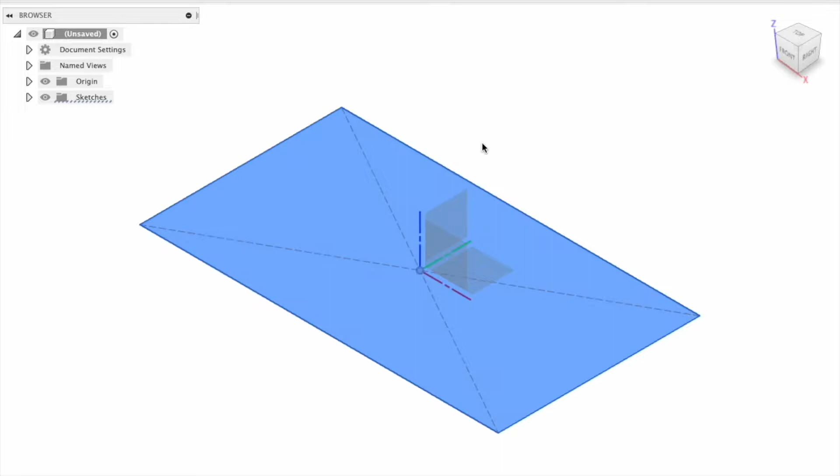Gonna do a little extrude here. So I think the first thing I did, I hit S, and I have a bunch of my shortcuts here. You should already be at the place where you can build your own shortcuts. So I'm not going to explain that. So I finished my sketch, and I'm going to click here and press Q to extrude. And then I'm just going to pull it up a little bit and wait for my computer to catch up. I've just created a new body here.

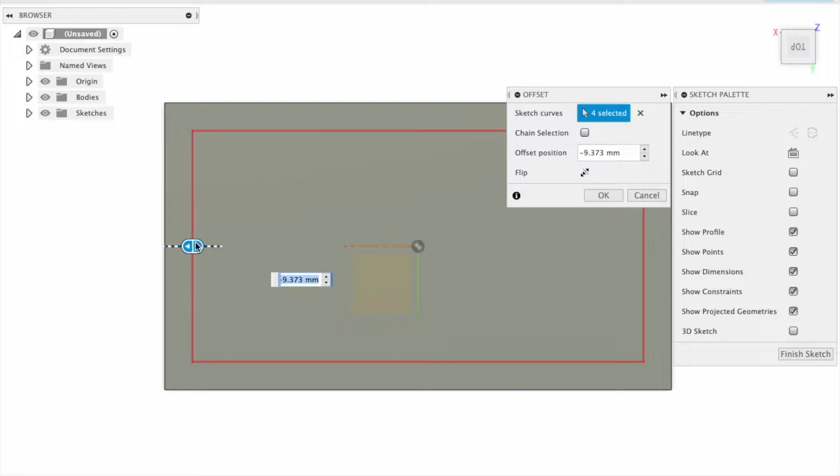So the next thing I'm going to do is right click on the top here and go to create sketch. Then I am going to, let's maybe click here, double click the perimeter, and click offset. I'm just going to pull this in here and then click OK.

Because what I want to do is pull up the outside. So I'm going to click on the outside I've just created and press Q again. Then I'm going to pull that up to this. And over here, instead of join, I'm going to click on new body and click OK.

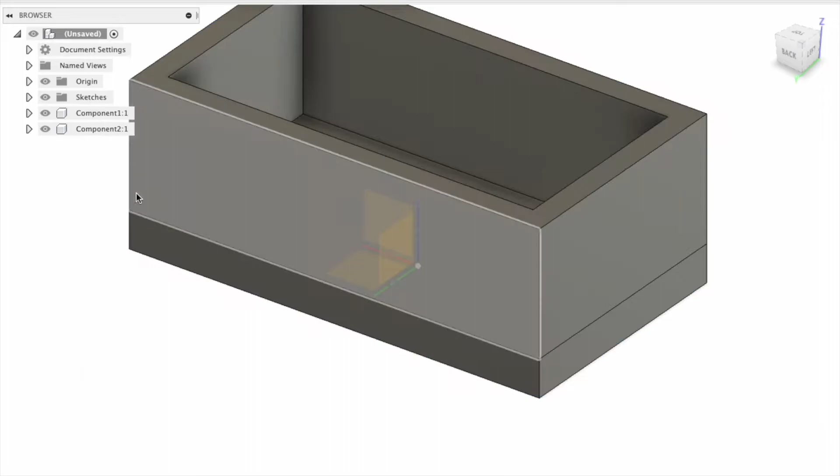Now these are two bodies that I have here, and we can see this over the body section. I'm going to highlight both of them, right click, and go to create components from body. So now I have two separate components here, the bottom and the top component. You can double click and call them whatever you want.

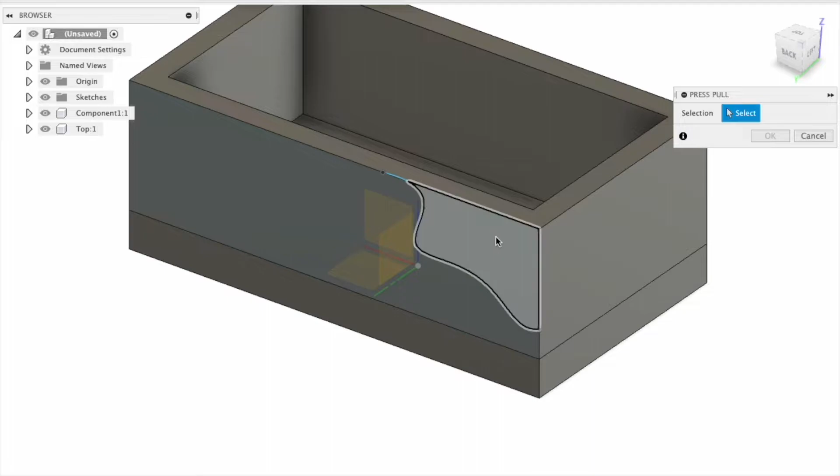With the top, I'm just going to do one more thing. I'm going to create another sketch, do a free form, and pull it, make a little wonky design here to the end. I'm going to finish that, and press Q, Q to pull.

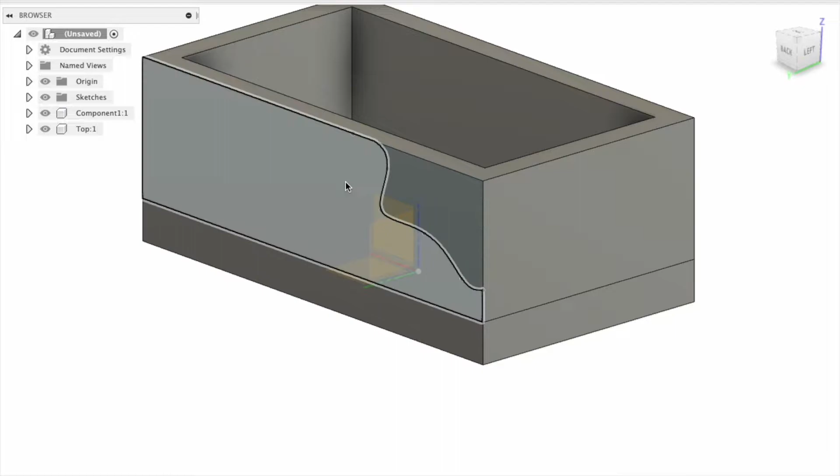I'm going to go around to this side by pressing Shift and two-finger swiping, then click on the other face, and it's going to automatically pull it across and choose the operation cut there. So I didn't quite pull it across as far as I wanted, so I'm going to try that one more time. See if we can pull it right over here.

I'm not sure why it's not cutting that, but as a shortcut, instead of trying to figure out what's going on, I'm just going to pull it farther than necessary, and it's going to chop right through that. So now what we have here is a little Santa Claus sled, which I've unintentionally made.

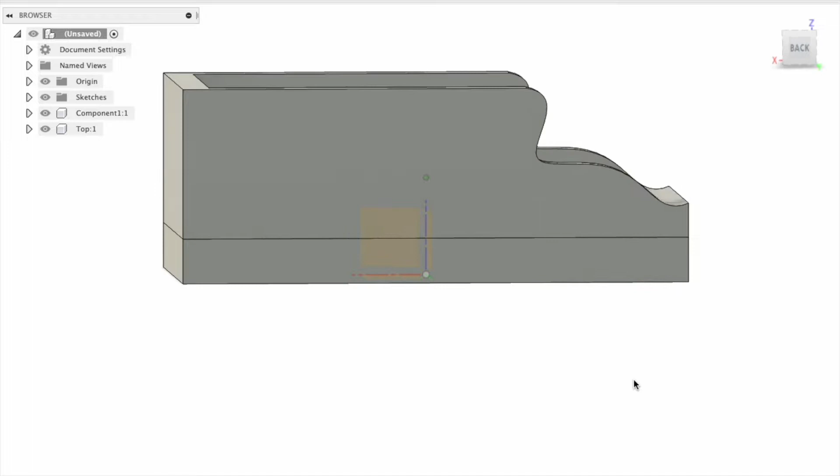So I'm just going to save my design here. And I'm going to call it Santa's Tester.

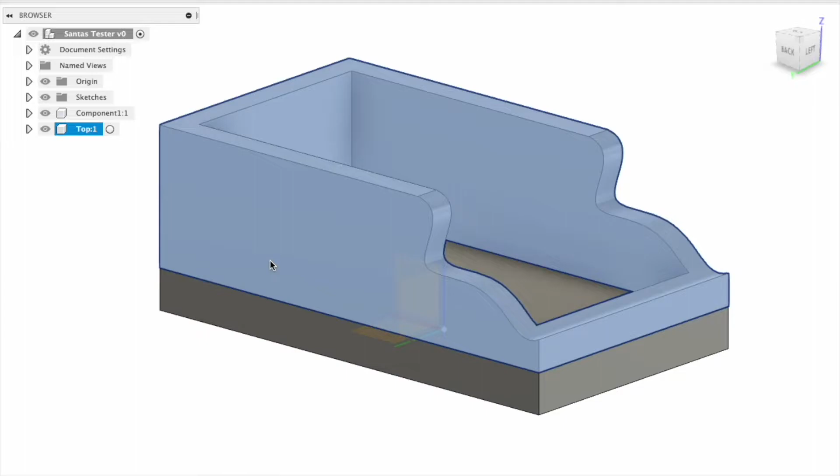Then what I'm going to do is start adding materials. I'm going to right click on the top and go to physical material, and make the top of Santa's sled out of not gas but glass. You can see there are a lot of different types of glass here, and this is going to affect the stress test that we're going to do soon enough.

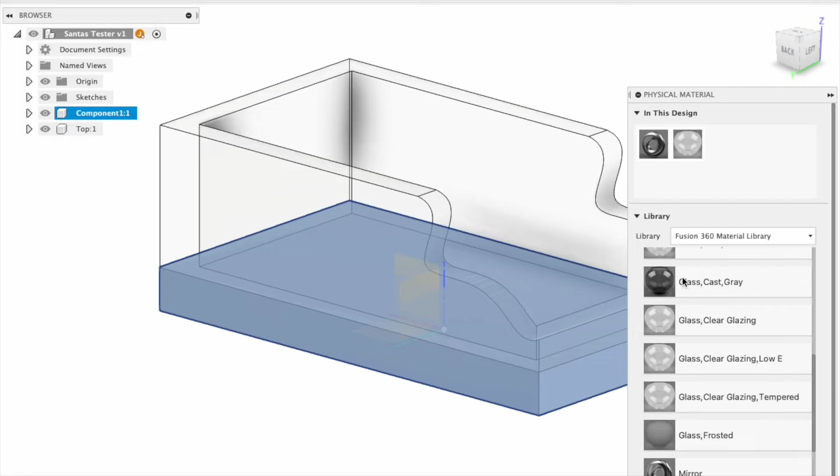Then I'm going to right click on the bottom component, and what I did was I just dragged the material over and dropped it on top of the component I wanted. So I'm going to the second component now, and I'm going to make it out of, let's make it out of metal, aluminum. So let's take that, and again I just dragged it and dropped it on here.

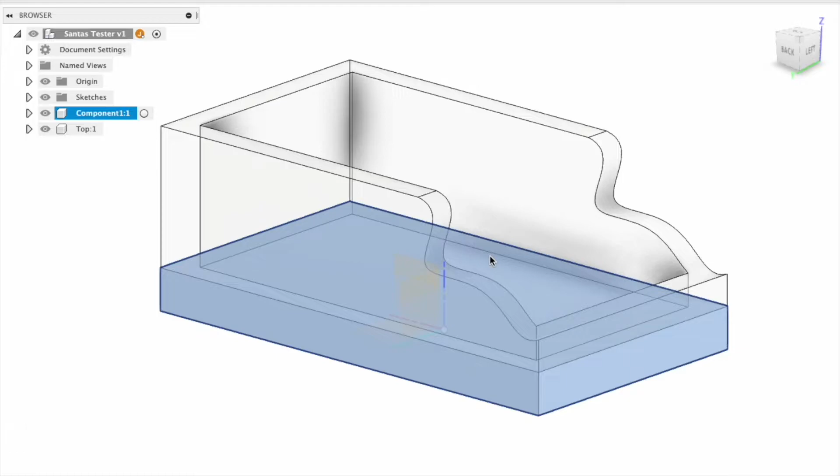You see there's a lot of different types of aluminum, and each one has its own special properties, different types of strength and different material characteristics. So that's what we've done. If we look at the component now and go to physical material, we're going to be able to see, I just want to make sure that this one is aluminum. Okay, and then we should be done for this.

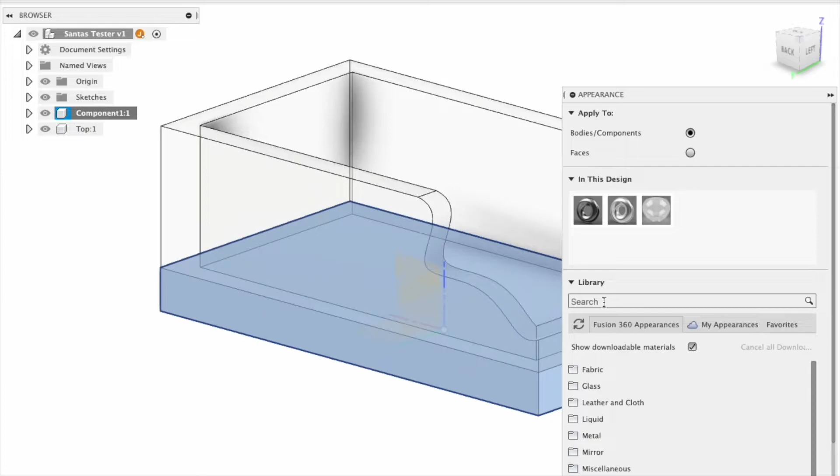So the other thing I want to briefly touch on is appearance. The appearance is what it actually looks like on the outside, so this is if you were to paint it, you could give it a look. So if I want to look for a green color, because you know Santa likes green, right? I can take the green and make it look green, although when we're looking at the physical material it's still going to be glass. All right, so now we've got that.

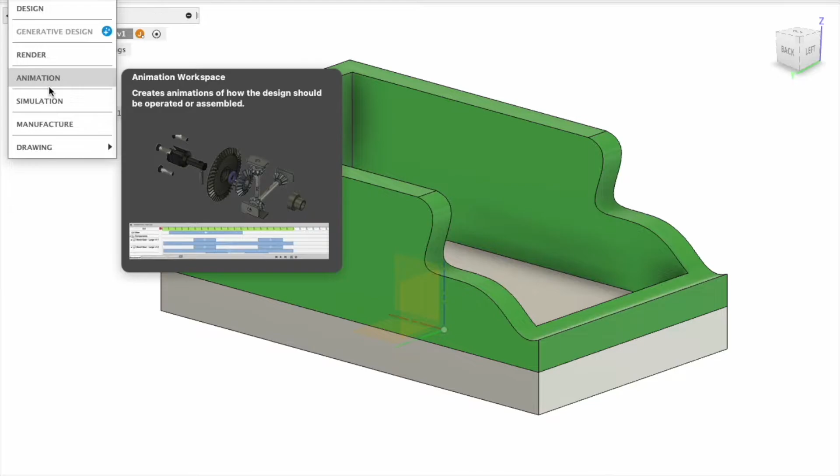We've got two separate components. We've done an appearance, so it appears to be green. The physical material itself is glass and aluminum. Now what I'm going to do is go over here and create an animation. With this animation, you can actually do one that goes through time, and you can record an animation on this.

All I'm going to do is move this component so it's slightly separate from the other component, so we can see it's two separate components.

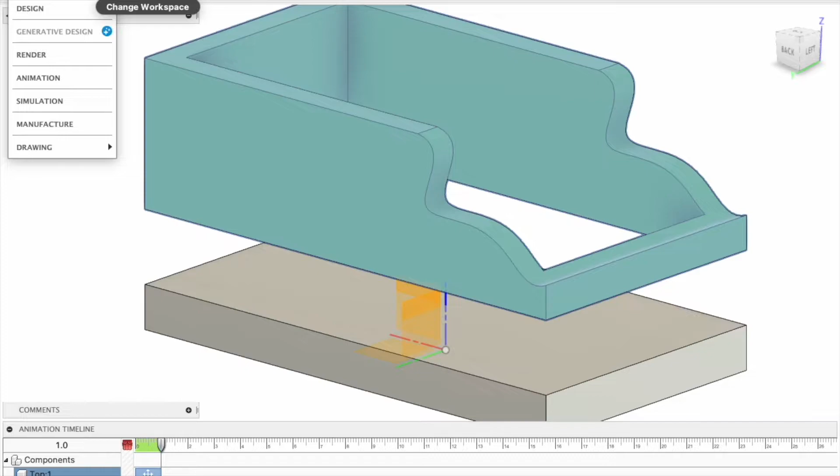The reason I'm going to do this is because I'm going to go to drawing from animation here, click OK, and this is going to give me an exploded isometric drawing that I can then create a components list with.

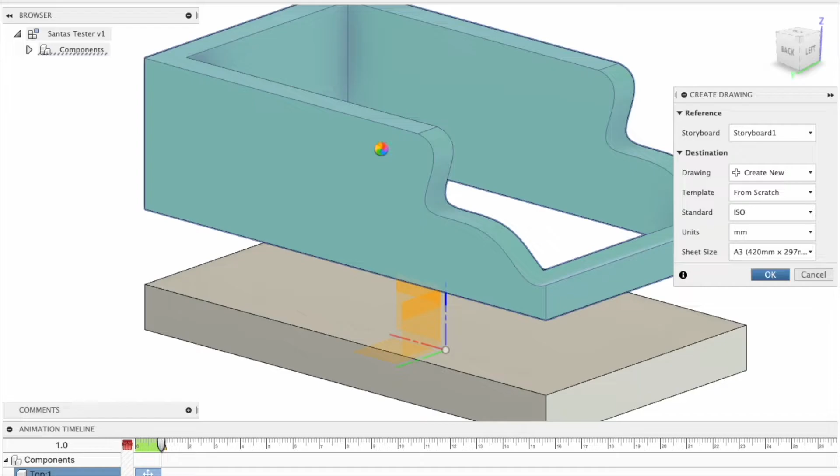So this is a really cool one. Now we'll wait again for the computer to catch up to me, and I'm probably going to chop this portion out of the video, so it's going to immediately switch over to the exploded isometric drawing.

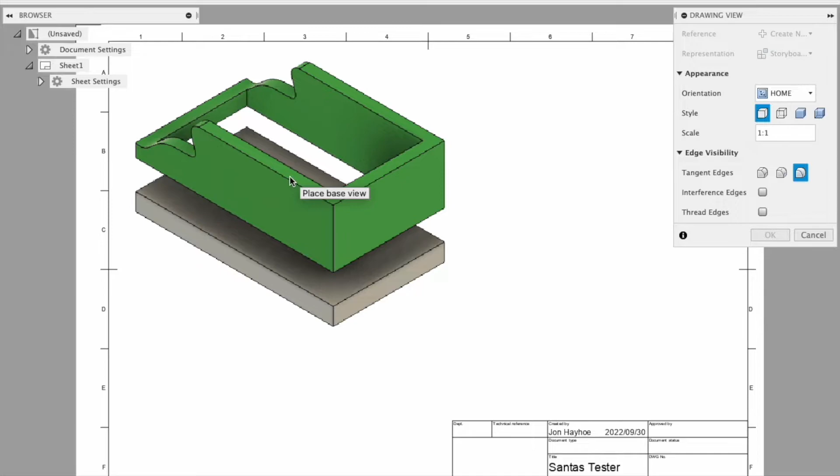I'm just going to click here, and then I can click on maybe shaded drawing. That's going to keep it nice and colorful for me because I'm doing the exploded isometric.

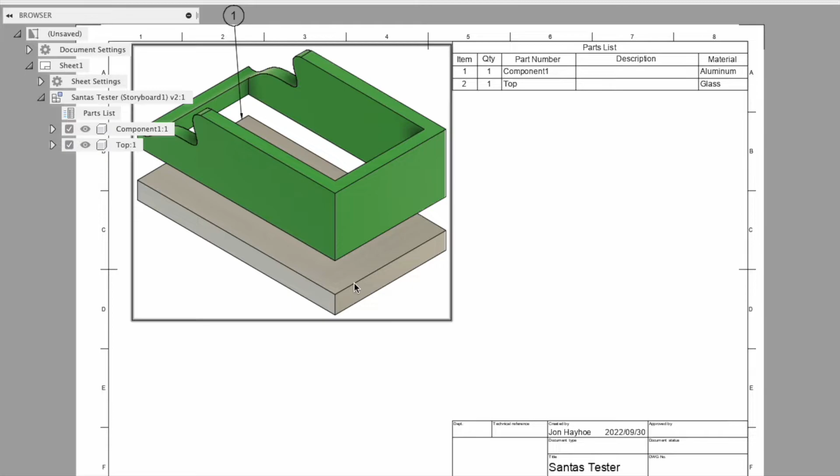I'm going to go up here and click tables, and I'm just going to put a table in here, and you can watch, boom, this has automatically just made a table with 2 components.

One of them should say number 2 somewhere, but it's not showing up. It should have a number 2 sticking out somewhere, which I'll have to look into in the future. But item number 2 should be made out of glass, which is here, and item number 1, which it's pointing to down at the bottom here, is made out of aluminum.

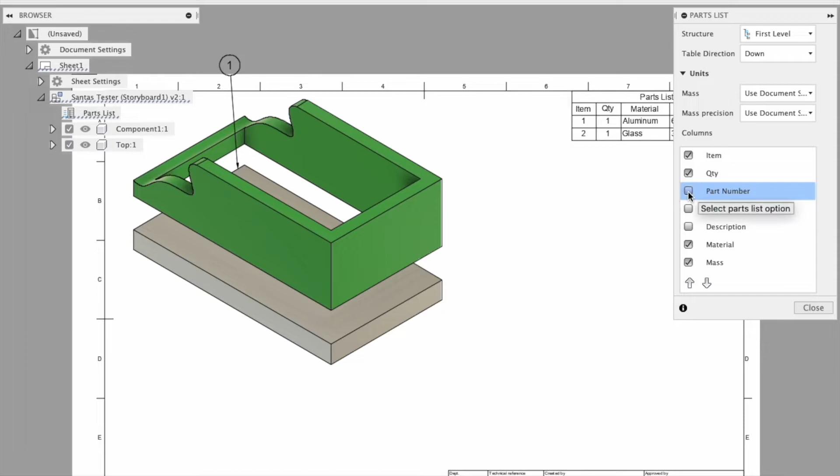And then it shows the quantity and everything. Actually, if you double click on the table, you can add different things in there. So because I don't have a description, I can take that away. The part number you can include or disclude, the quantity you can put in there as well. It's really cool. The mass actually helps you calculate costs and things like that.

And again, I'm not sure why the number 2 didn't show up, but it's because I only have component 1 clicked.

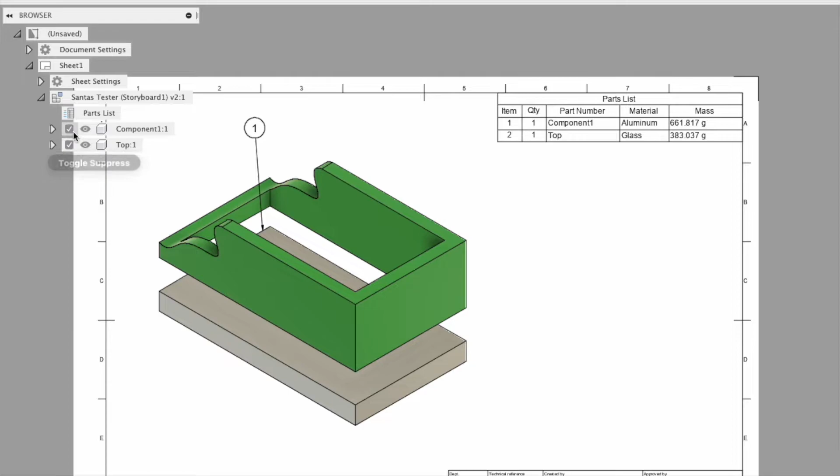So that's going to give me an exploded isometric drawing, which is really, really cool.

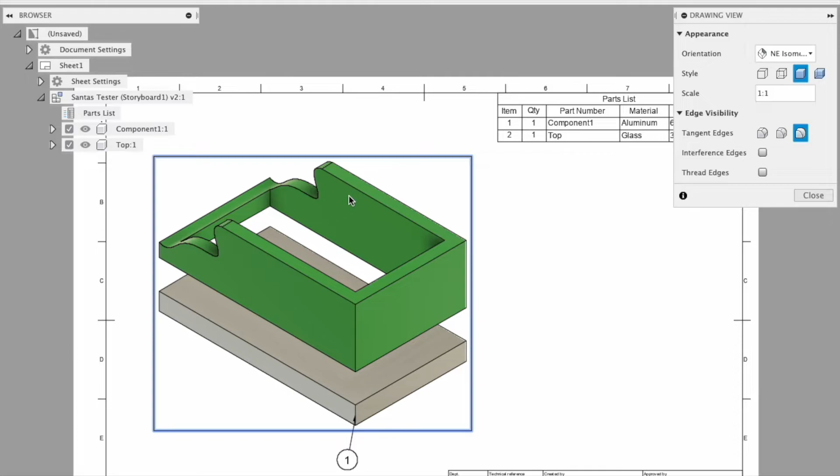The next thing we're going to do is go back here to our design view, and we're going to do a drawing from our design.

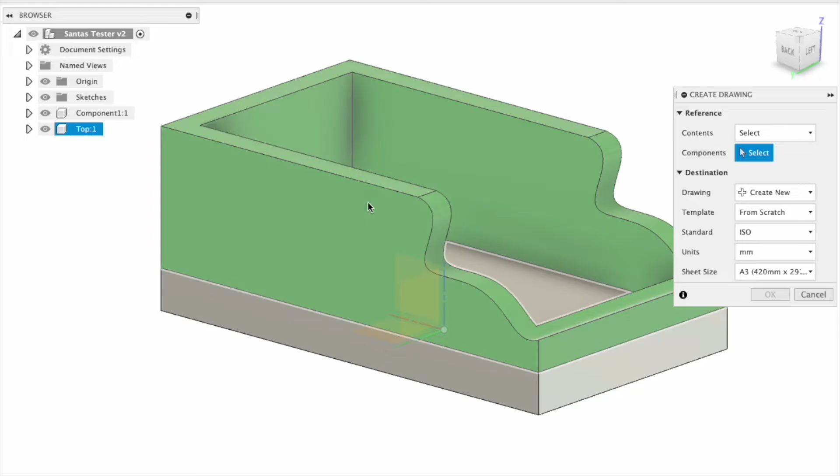So here's our design here, and it's multi-component. The cool thing about this is you can actually do a full assembly, or you can select the components that you want, and do diagrams based on just one of your components, which is really cool, especially if you have a very complex product that you're making. Maybe you just want to show what one component looks like, top view, front view, side view.

So I'm just going to actually select the top component here, the top of Santa's sleigh, and go to Design, Drawing from Design, and press OK.

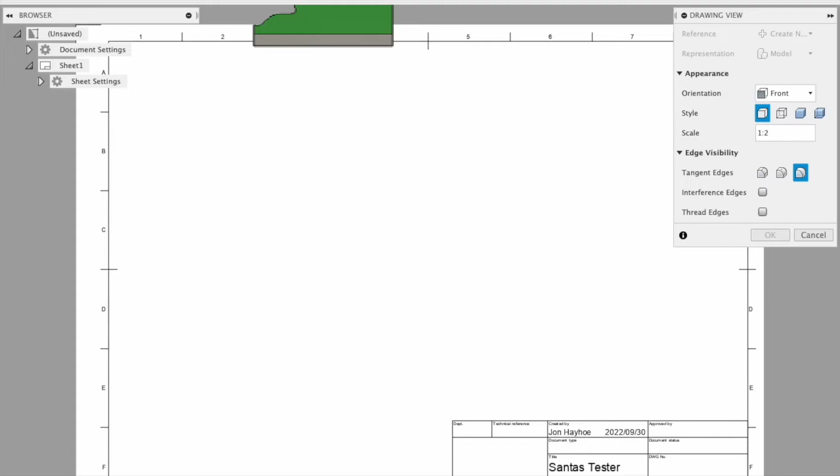Oh, no, that's full assembly. Whoops, we've done it wrong. So it has all of Santa's sleigh there. We're going to cancel out of that, and we're going to try that one again.

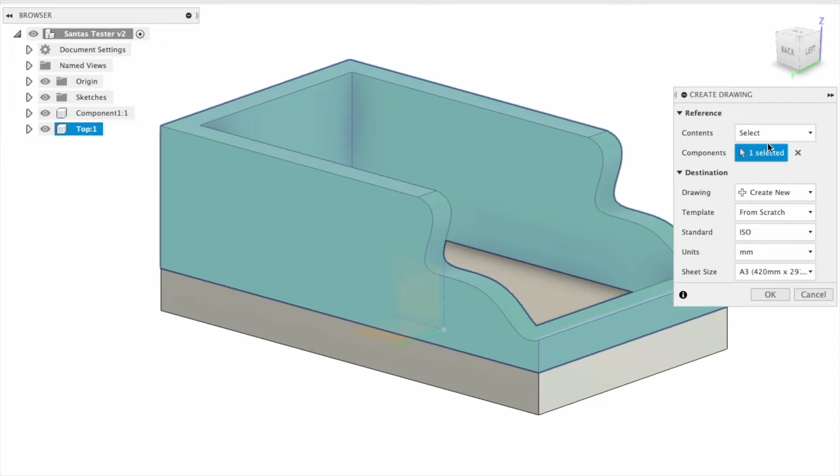So what we're going to do is, back here, we're going to do a drawing from design. Instead of full assembly, we're going to go to select, and we're just going to select the top component. You see there's one selected there, and I'm just going to click OK. Then when we get into this section, it's just going to have the top of Santa's sleigh there.

And maybe I can even make this 1:1. Let's see if that's a little bit too big. So I'm going to do 1:2, and that's going to be our front view.

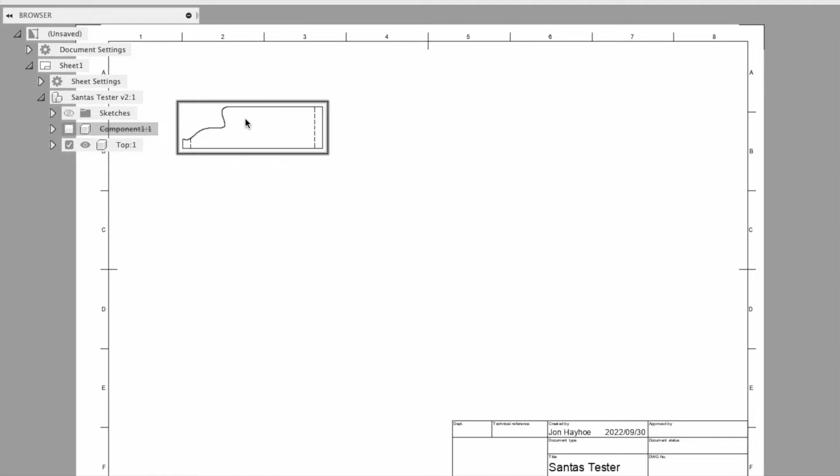Then I'm going to click on projected view, click that once, and then tap here once, and move it over here and tap once, move it over here and tap once, and then move it over here and tap once. Then I'm just going to hit enter, and now I have my 3 views.

And if I double click here, I can actually go to the solid section over here, shaded, or with the dotted lines in there, which is pretty cool. So this isometric view, if you kind of have it with color and everything, it looks pretty cool.

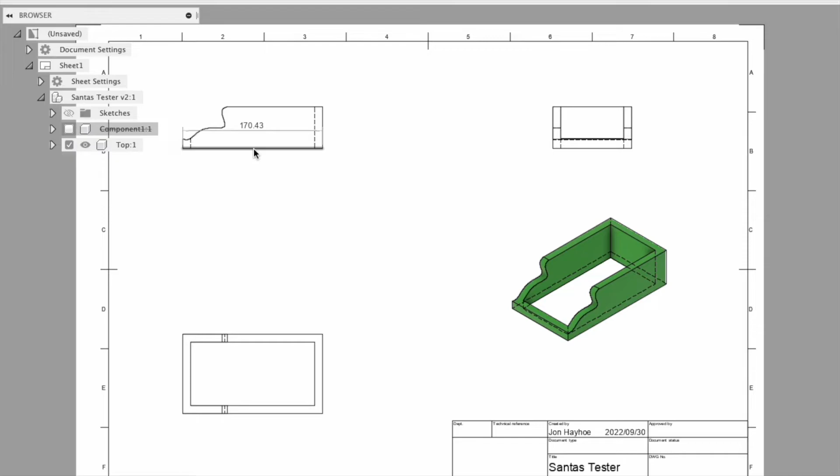Then if I hit D, I'm just going to get all the dimensions possible here. The only thing you're going to need to add on top of this, once you've gotten all the dimensions, as long as you have all the dimensions here, you can use radius at points here. Again, I won't go into the detail.

One thing you do want to add is the views. So I'm just going to go to text here, and I'm going to call this side view.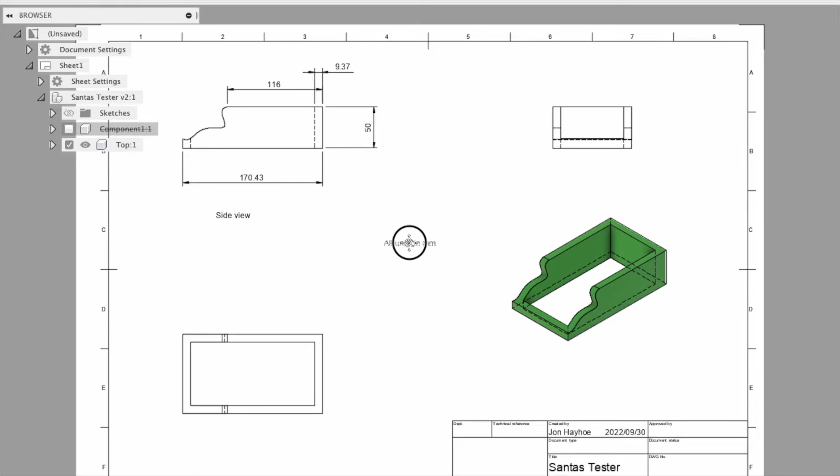And this one I should call front view, and this one top view. I'm going to put all units in millimeters, so the user knows all units are in millimeters. That's going to be a great orthographic projection view of the top of Santa's sleigh. I'm going to make two of these so I can have two pages of diagrams for myself when I go to make this actual product.

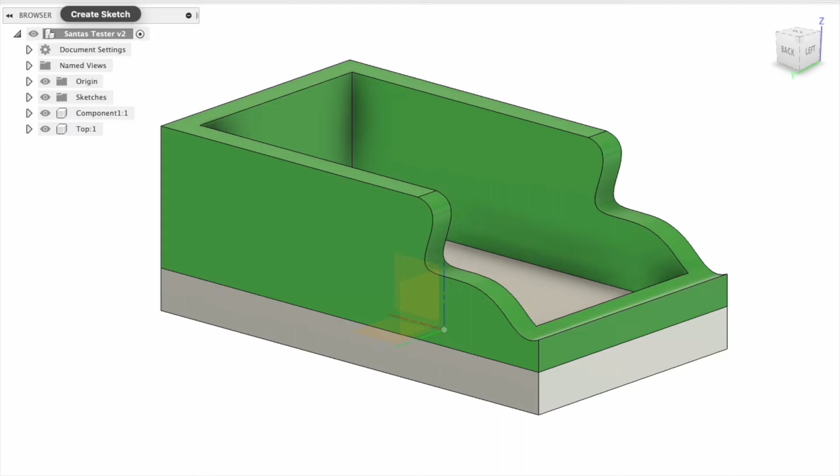So now I'm going back here. We've done drawing from design and drawing from animation, and we've made an animation. The last thing we want to do is a simulation.

So I'm going to click simulation and do a stress test, creating the study here. I'm going to do a cool study. First I'm clicking on the whole product, and I'm going to put the constraints on just one side of the product.

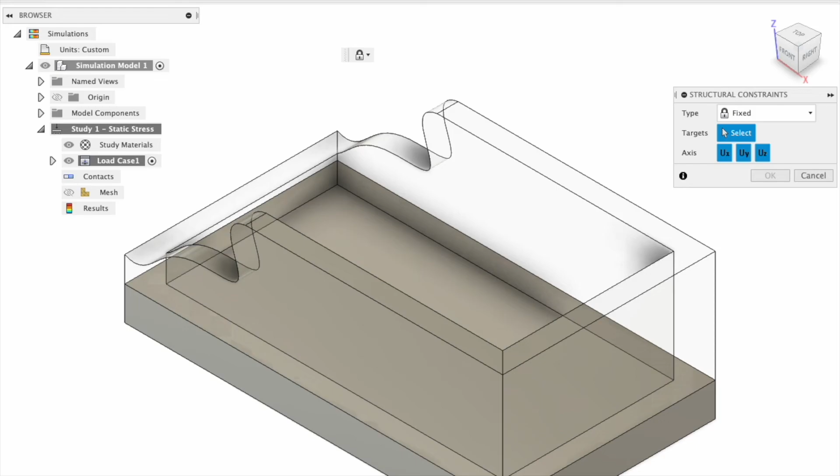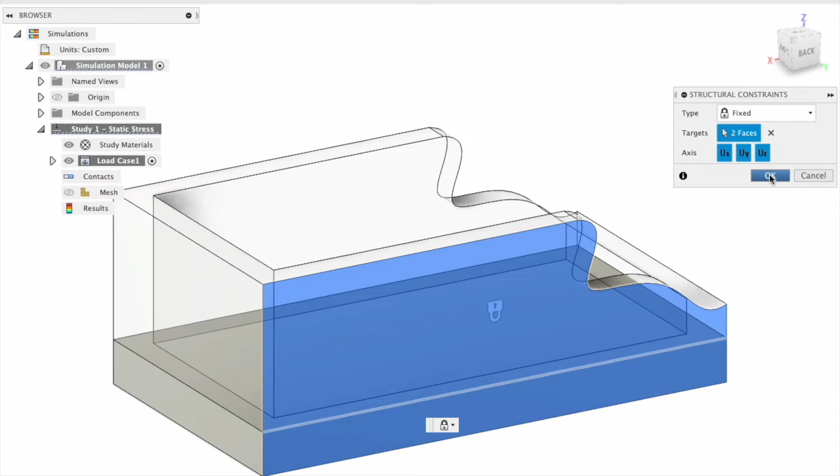So I'm going to move it around and put the constraints right on this side here, one constraint here and one constraint here. This is where the position should be locked, so when I run a stress test, this position will never move or budge. I'm going to click OK, and I can see the constraints here.

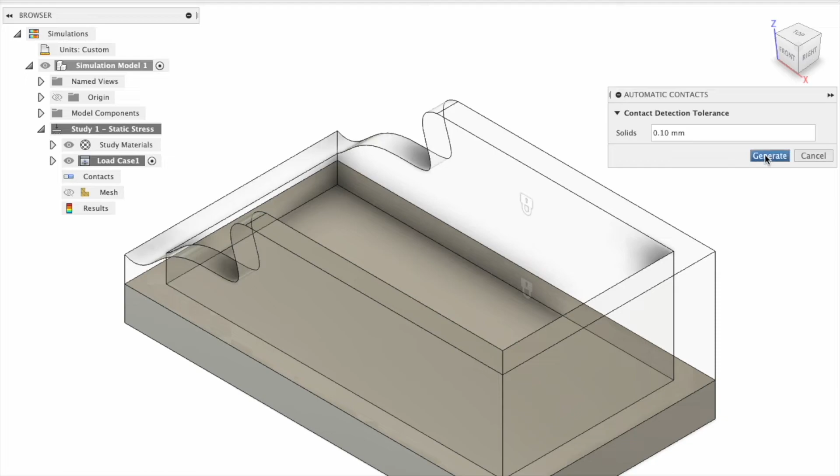I also want to do contacts, so I'll click automatic contacts. It says solids with 0.1 millimeter or less gap between them, which these two components have, are automatically going to get stuck together. I'm going to generate that, which basically makes it a solid model, as if we printed out two separate parts on the 3D printer and then glued them together.

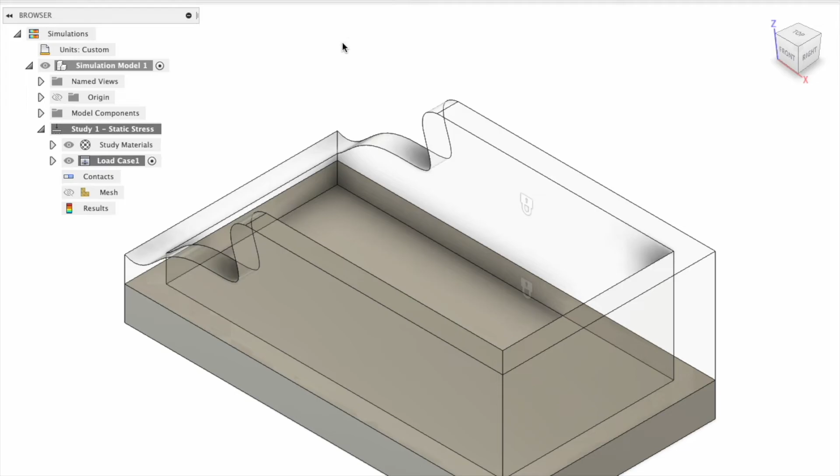All of our materials have already been chosen because we went to physical properties and chose glass for the top and aluminum for the bottom. Now I'm going to add some force loads onto this thing.

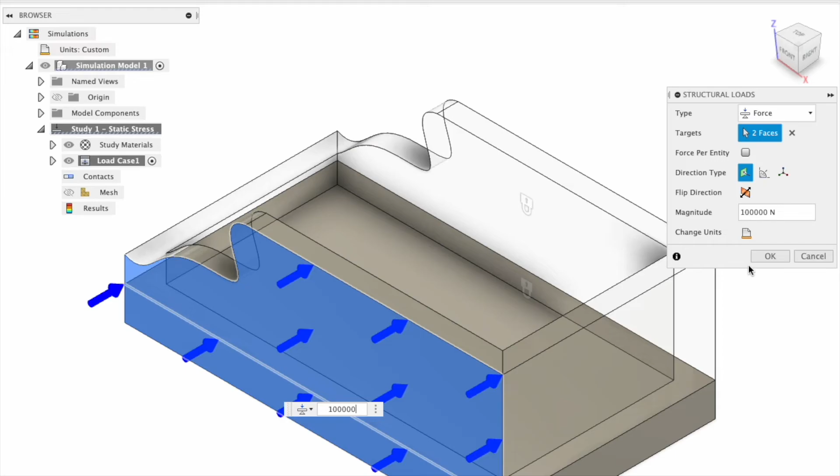So I'm going to put a load here and a load down here, and it asks how many newtons of force we want to apply. I'm going to put 100,000 newtons of force — this thing is going crazy. Okay, there we go, so I put the load on here, 100,000 newtons, and let's click the results.

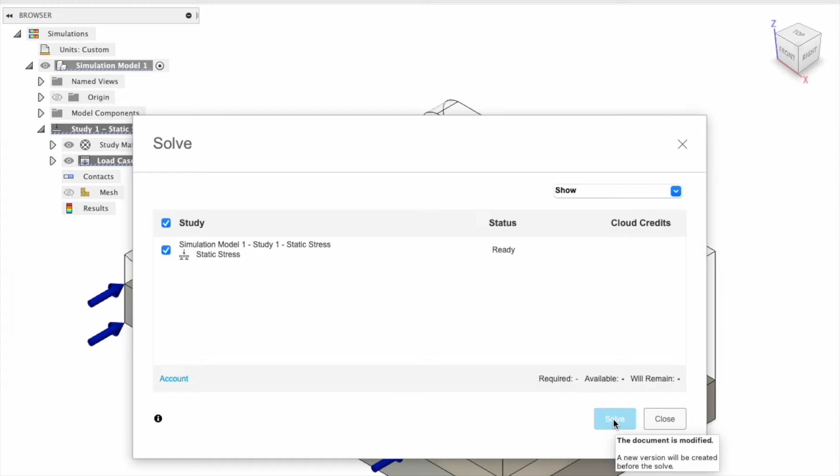It says the results haven't been computed yet — do you want to compute them? Yeah, sure. It says we're ready to go here. Let's see if we're going to be able to solve this. It's ready to be solved, so I'm just going to click solve.

And again, with the magic of iMovie, I'm going to skip this waiting bar all the way to the end. Ready? Voila, this thing is going to be done. Oh, here we go — okay ladies and gentlemen, we have a critical failure. This design is expected to bend permanently or break under the current analysis criteria.

So if you're looking at Young's modulus, this is going to the — what's that point called again — we're going past the elastic part into the plastic deformation part. So when it turns plastic, it's going to be deformed permanently. If you're in DP watching this right now, that's what that's saying.

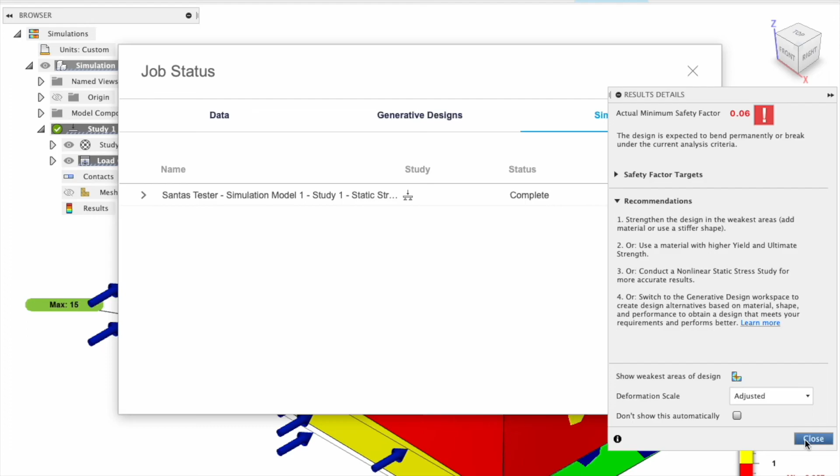Okay, so I'm going to click OK here, close this, and look at this — what a beauty. This is saying all of the stuff in red is going to be permanently deformed. Look at that warp on there.

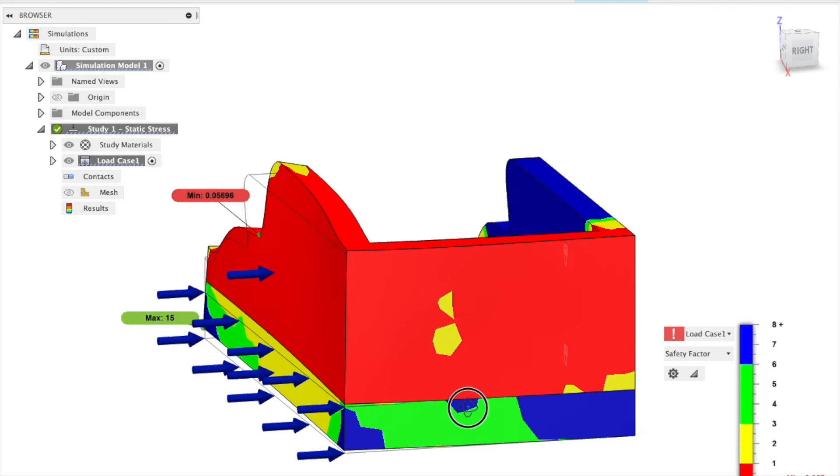So here we have this is the load case. I'm going to go over here to stress, and you can see the maximum point of stress right here. So if you're going to fix this, you can see our maximum point of stress right away, which is really cool.

You can see it's maxed out here, but also there's a big tense point here, and over here there's a big tense point too. So if you were actually going to support this, you'd put Santa's seat right in here, which would wedge these two things apart and give it a little more strength.

Okay, so you can see the max strain is in the exact same place that the stress was. So with Young's modulus, these are the points you're really going to want to reinforce. And again, we haven't even made this thing yet, and we already know where the points are that we need to reinforce on Santa's sleigh, which is really, really cool.